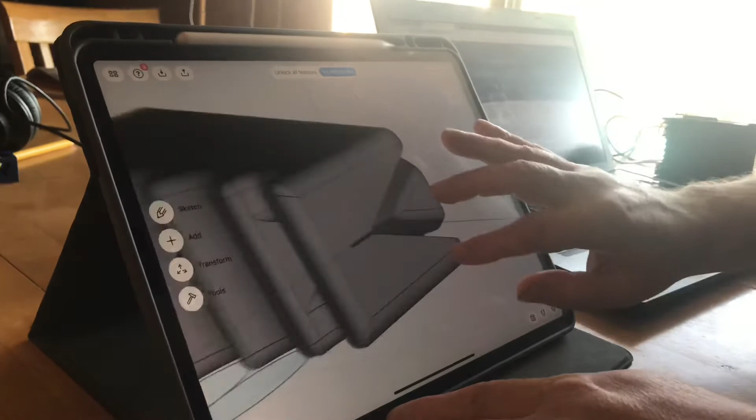This is definitely easier said than done. I'm using a CAD program. Anyways, I rounded it off.

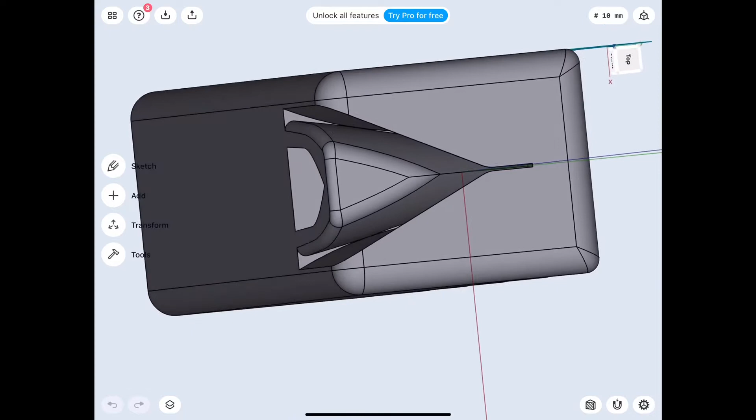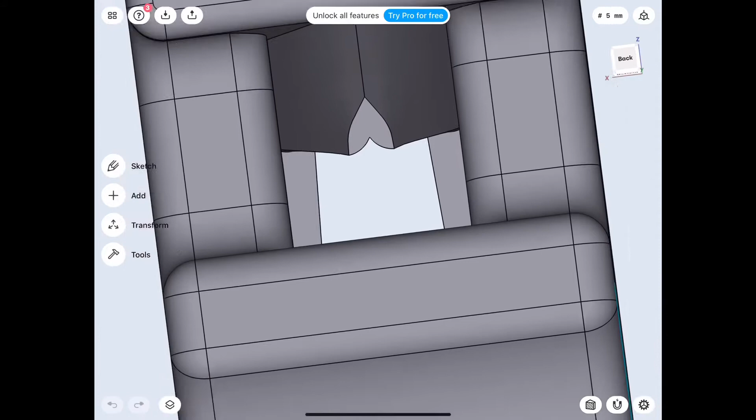The point is this V section right here, that's where I'm going to drop the rag into, and it's going to get caught in this one little channel right here. Then it's going to be fed through, draping over this little part, almost like a dorsal fin if you look at it. So it drapes over there, and then this hole down at the bottom, I'm going to tuck the rag back through, and it's going to come out this hole.

I'll probably have some other type of catch right here, but I don't have that designed into it right now. Anyways, I need two of these. This is just a prototype.

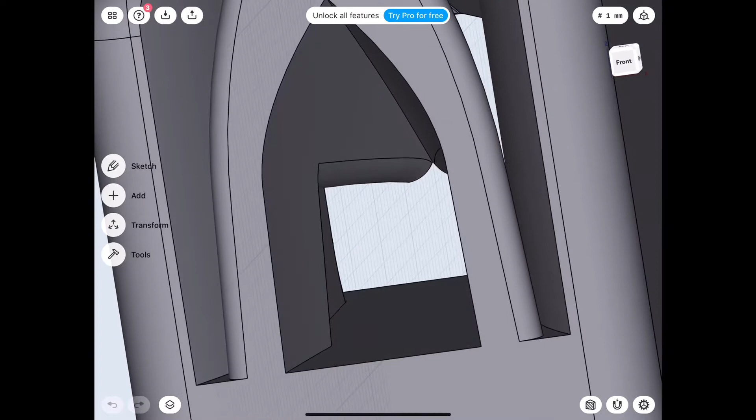There are maybe some structural concerns, like I'm not sure if that's going to be strong enough. But what I'm going to do is build this out of PETG plastic using a 3D printer, and print this all out, and hopefully it'll be good. I just threw in some kind of a pistol grip.

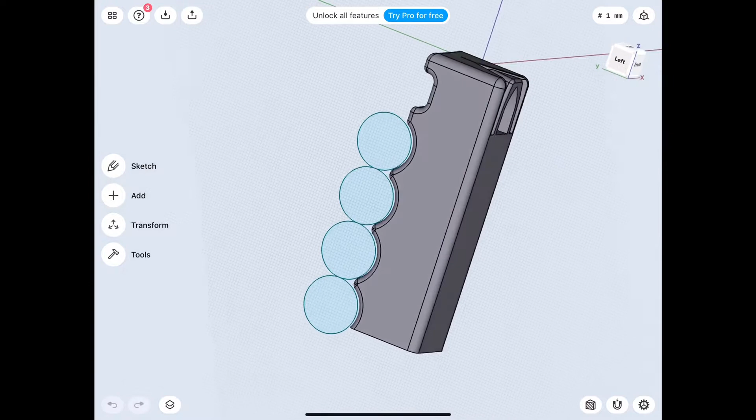I don't know how this is going to fit into my hand, but the bottom line is this type of organic structure right here, there was all this stuff I had to do to be able to get this to happen.

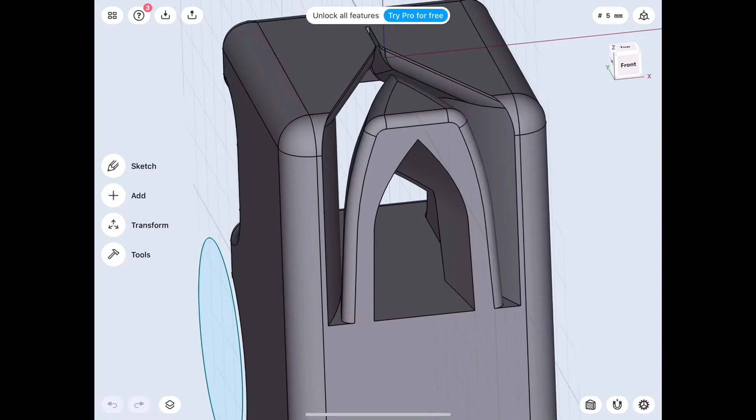So I have some concerns, definitely some structural concerns on this. Like this, it kind of looks like it's going to get pinched right in here, down at the bottom. I didn't even notice that till just now. But whatever, I'm going to print this out and I'll show you what the printing job looks like right now.

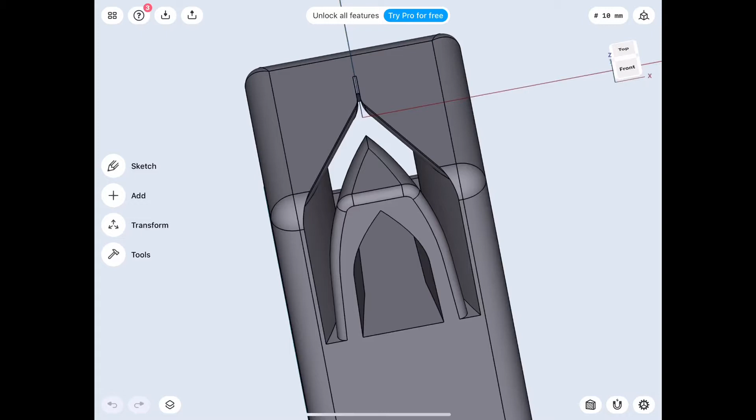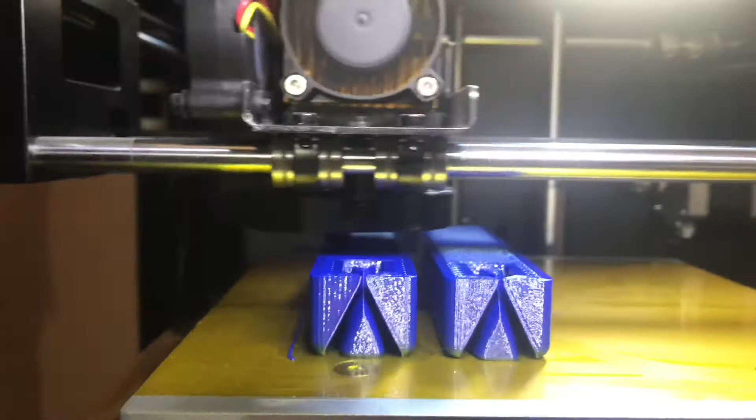So I'm printing these out on my 3D printer, and we're into 4 hours and 20 minutes, still got 2 hours and 10 minutes before this thing's completely done. But you can see how the shape is coming into play, and yeah, we still got a little bit to go.

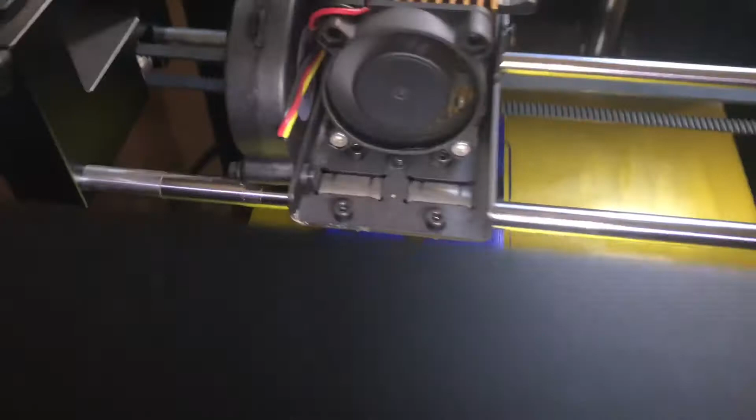I probably couldn't have made this if I didn't do some type of 3D extrusion like we're doing here. So in this case it's kind of ideal, but the point is, one piece, it needs to be one piece. I need to be able to just manufacture it really easily, and I could make as many of these as I wanted, provided the design is correct.

I am worried about this right here, worried about that not being quite rigid enough, so I might have to reinforce it. But it's engineering, it's an iterative process. The prototype is not like the finished model, but I need to make sure that this little shark's tooth thing, or however you want to look at it, almost like a claw, works properly before I decide, I don't know, I might have to abandon this design in its entirety.

But at least it fits a couple of the criteria, which is it's one piece, it's easily manufacturable, because all I have to do is basically make as many of these as I want, provided the design's good. So, anyhow, we'll see how it works afterwards.

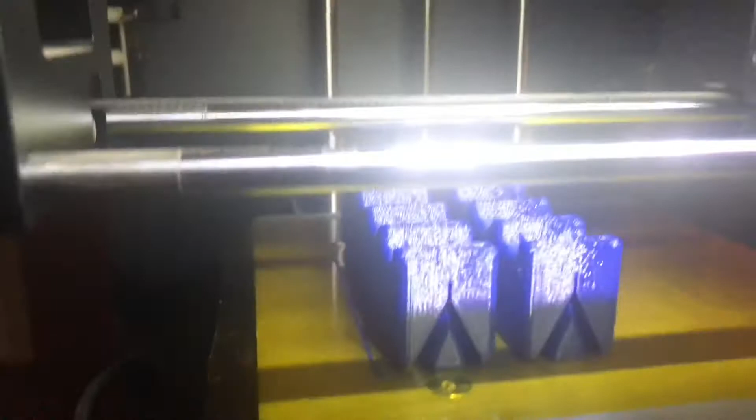Alright, so the print is done, and it only took 6 hours and 32 minutes. Actually, I guess it took 6 hours and 26 minutes to print, but that was in total, I don't have my computer tied up on this. So I'm just going to power it off and move the thing down, which will kill my light too, unfortunately.

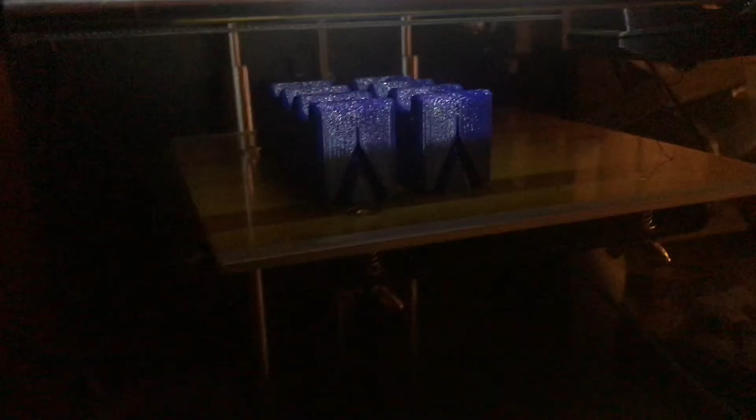So this thing is still plenty warm. Alright, so the print is done. It's dark in this room because of the way the house is designed. I'm just going to grab a hold of it and pinch it together and try to get it off this bed.

That's the thing that sucks about these 3D printers, these beds. If you don't do it properly, when they go to print, they just slide off, but you can see the whole bed is moving.

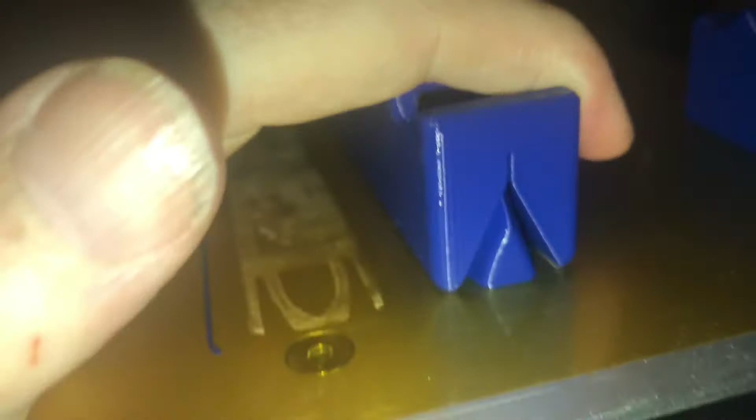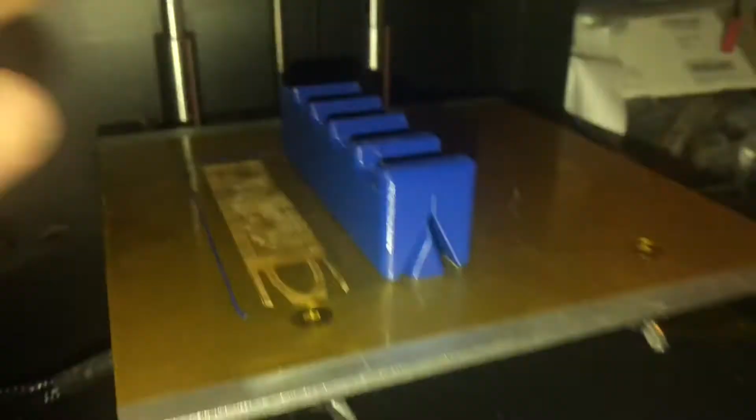Oh wow, well that's kind of what we need. Sometimes I use a crescent wrench. Wow, these are really on there. Probably could use a rubber mallet, would probably be best. But let's take a closer look at this thing and see how it works.

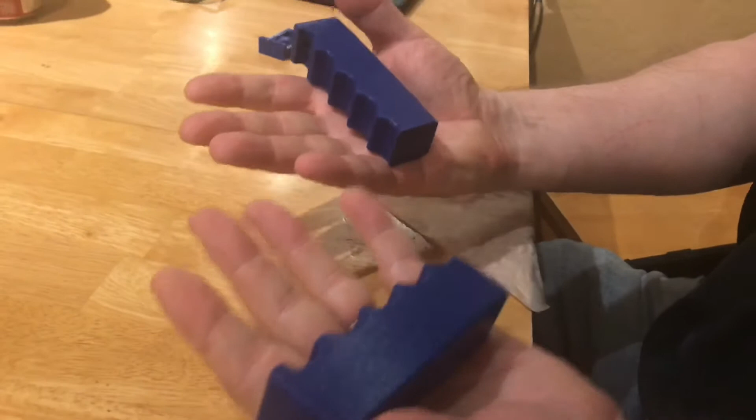All right, so we got our two pieces, and comfort, they're fairly comfortable, but I didn't go long enough on this, so this edge is sharp, that's definitely not comfortable. The other thing is, when we're using these, we're going to be wearing acid gloves, right? So even though I've got pretty large hands to begin with, they're going to be even larger with the gloves. So maybe this should be a little bit longer, but it's definitely more comfortable than it was. I definitely can't have a sharp edge on this because it could potentially cut into the hand and cut into the glove. But let's see how it works.

So this is just a paper towel. I wetted it up so it'd be a little bit more pliable like the other stuff.

Basically what I'm going to want to do is just feed it in. And already I'm kind of not liking the fact—now granted, this is not apples to apples, right? This is now wet and it's behaving differently than one of these little, we call them dry wipes, because they're dry and they're kind of smooth.

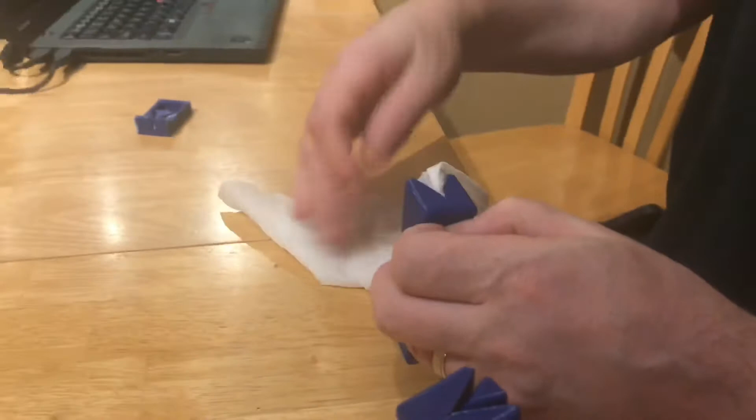Anyways, if I can get—so maybe I could make the throat of this a little bit bigger. But I'm going to grab a hold of it and pull it through. I really think this would be much easier with a different wipe. And pull it through about like this.

Okay, and I can see that it's already getting caught like right in here. That's what it's supposed to do, right? So I'll pull it in.

And another thing that I'm noticing that I don't like is I didn't make this quite big enough, so when I go to loop it back inside, I'm having a little bit of a problem with it. So I definitely would want to make this bigger. And then I can't get my finger in here either.

So I could use like a stick or something like that, some type of rod to push this in. But realistically, this needs to be super easy to get to, and how I'm digging like this is not going to be acceptable. So I'm going to have to make this little hole a little bit bigger.

Because we're not going to be able to do this in the work environment. But anyways, the idea was it's supposed to come and loop out like this. And one of the things it does is it gets caught and folds over into this little section.

So at which point I might add this. This is what I really need. I can't have this thing falling off into a quartz tank, which is basically like glass. Can't have that. This is somewhat heavy. It's plastic, so it's not an issue, but it is a little bit heavier than I should have.

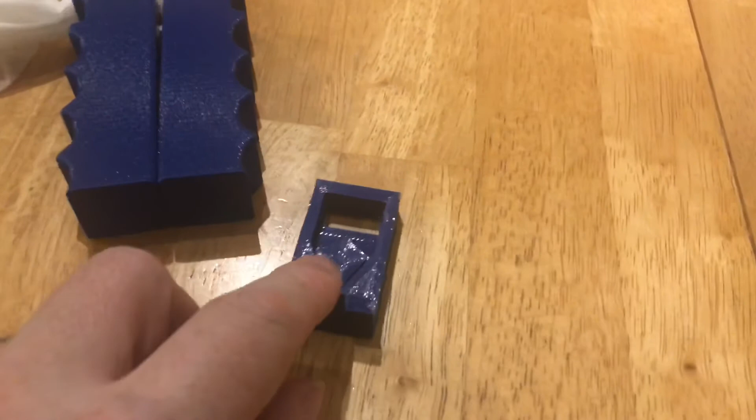So this is, again, the first actual prototype. I did some testing, which was this, right? And this mechanism doesn't work very well, but this one most certainly does.

So again, it's like — this is a paper towel, right? So I mean, it's going to rip if I pull on it. Cool.